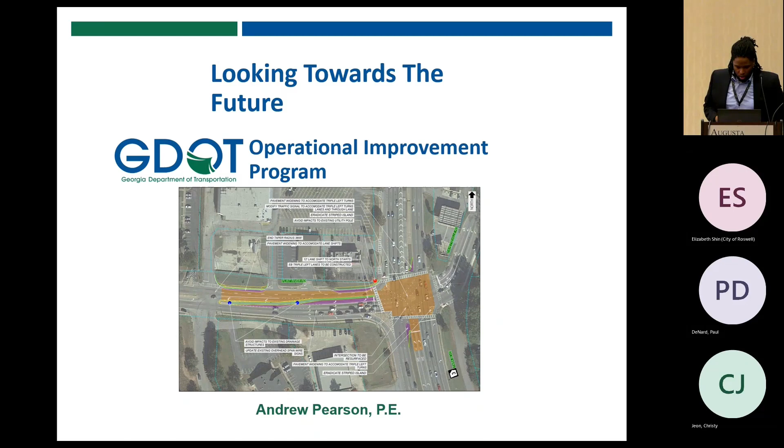So I'm going to talk to you guys about the Operational Improvement Program this morning. So the program, what is it?

Historically, small improvements have been necessary along our roadways, even after large-scale projects come through. So in 2010, GDOT senior management realized there was a need for a change, and so we came up with a program designed to deliver low cost and high benefit projects, with the program goals being to reduce delay, increase throughput, with a targeted delivery time of between 12 and 18 months.

So we're going to go through it, from solicitation to development to approval to delivery. The program is split down the middle of the state. The eastern side of the state is handled by Kimley-Horn, that's Districts 1, 2, 5, and the eastern side of District 7. The western side is Region 2, managed by Arcadis, and they have the western side of District 7.

So solicitation, we get our ideas from just about anywhere, honestly. It starts within our office of traffic operations. We all live in various different places throughout the metro area. For me, I live in South DeKalb, so I can tell you what's wrong in South DeKalb. My PMs, some live in Alpharetta, some live up in Cherokee County. So we try to bring our own individual knowledge base for what we're seeing out on the roads and kind of see what we can do from that standpoint.

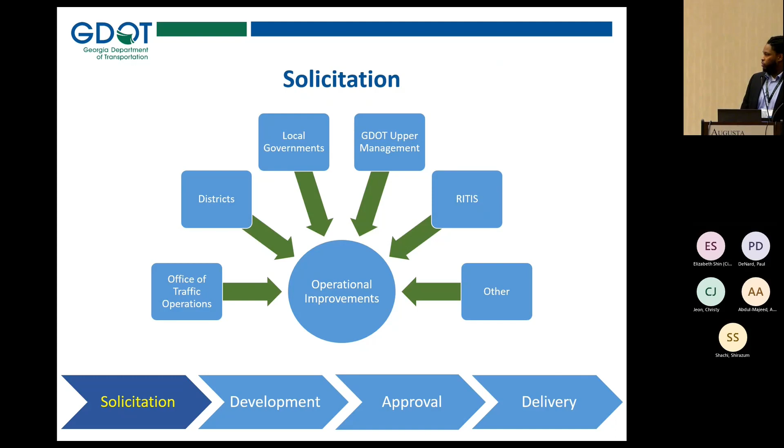So I just showed you the idea database essentially. When we're looking at whether or not a location is viable for our program, we're looking at if it's going to cost a lot of money to construct. We're looking at right-of-way impacts, environmental impacts, and utility impacts as well, and then there's benefit or need for the project. So what our program operates on is the BC ratio, the benefit cost ratio, and obviously the higher the BC ratio, the more viable the project typically is. We're generally trying to avoid anything with high right-of-way impacts or large utility impacts, because that's going to delay the project and drive up the cost.

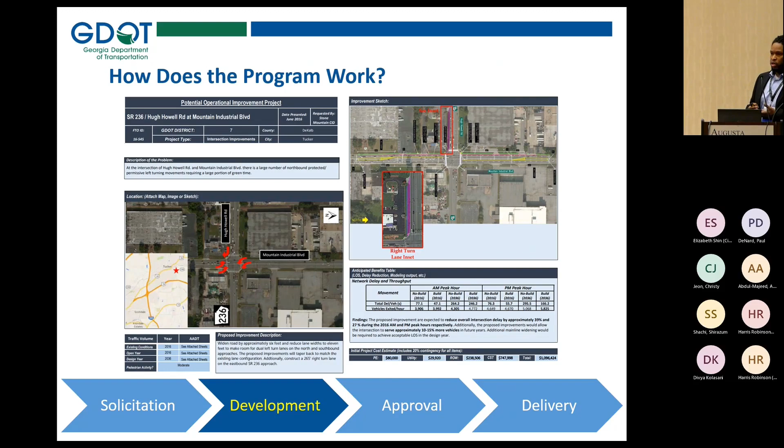After we determine that the location is viable, we'll come up with our synopsis packages. This is a cover sheet for State Route 236, Hugh Howell Road and Mountain Industrial Boulevard. We generally provide an aerial shot of the existing location, the delay it's currently experiencing, what the expected delay will be if we don't build anything there, and what the delay will be 20 years out. We have a summary of the expected improvements, and in the lower right we have the breakout of PE cost, utility costs, right-of-way costs, and construction cost.

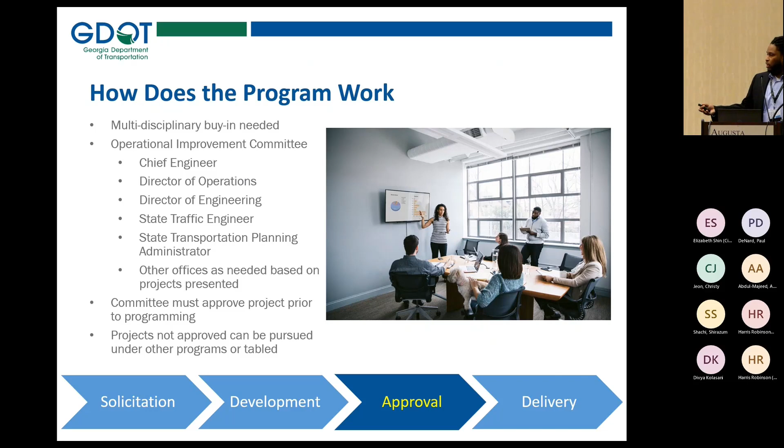After we come up with a synopsis package, we have to present it to what we call the Operational Improvement Committee. That consists of our chief engineer, the division directors over engineering and operations, the state traffic engineer, the state transportation planning administrator, and other offices may be called in to those meetings just to make sure we're not overlooking something and to get those projects approved.

After those projects are approved by the committee, they'll be programmed, and we have multiple options for how we program. Sometimes we have quick response projects, which won't necessarily have to go through the committee. Usually those are significantly cheaper, with a cap of about $200,000, and the districts handle those themselves. We give them the idea, tell them what needs to be done, and send it to them, and usually through their state aid office they'll get those projects completed.

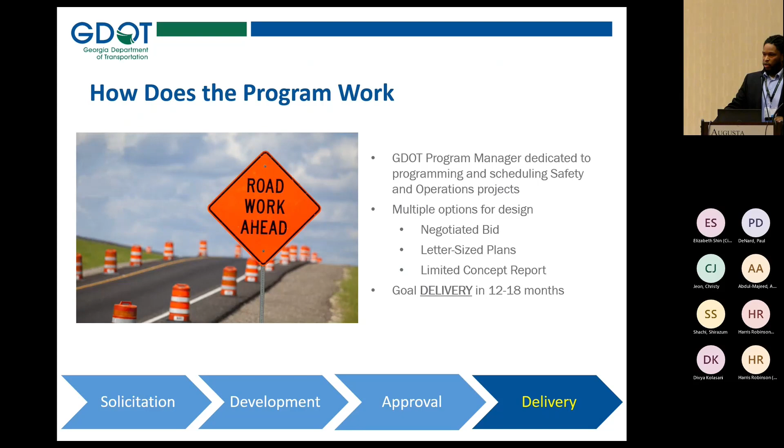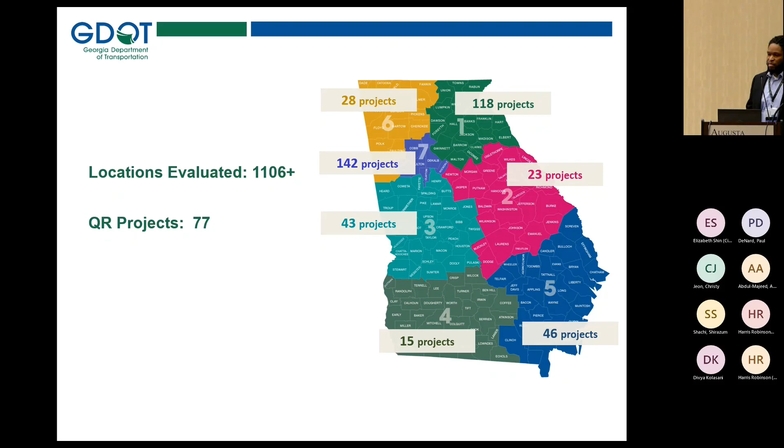So what has the program accomplished? We've looked at a total of over 1,100 locations throughout the state, and we've programmed 77 quick response projects. Currently we have around 415 projects that are active, meaning projects in various stages—currently being screened, under construction, synopsis package, or quick responses. You can see the breakdown: District 7 has a good bit of projects, while District 4 only has a total of about 15. That makes sense when you look at the demographics and how the population is spread throughout the state.

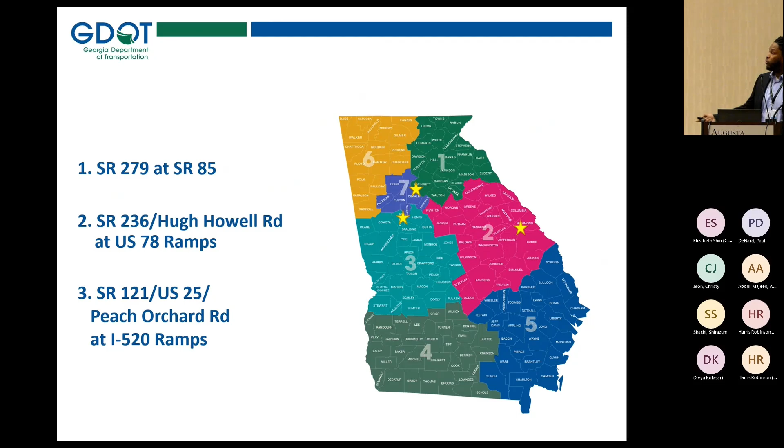So what I'm going to do now is go over three projects that have gone through the entire process—two of them are currently completed, and one is about to begin. This one is State Route 85/279 in Fayette County. This is essentially what I like to call our bread and butter as far as the operational improvement program is concerned. Really what we like to do is extend turn lanes and add turn lanes wherever we can.

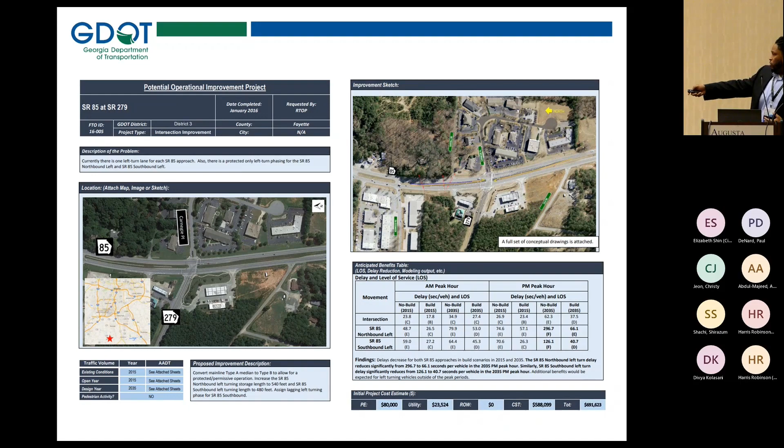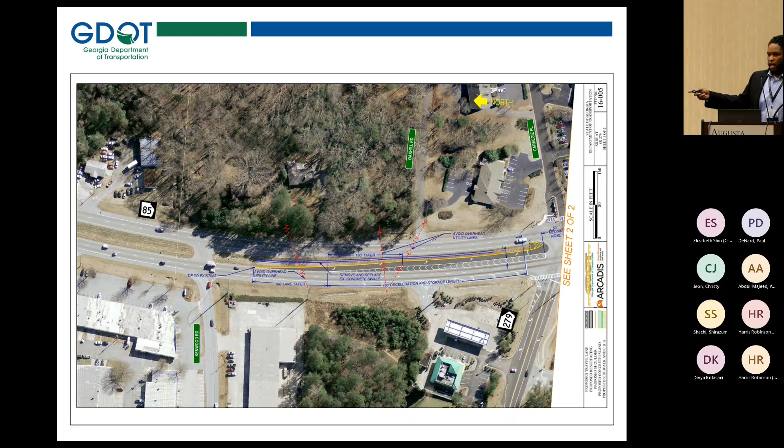So we'll go to this next screen. What we essentially did here is utilize the type A median, then widen into the median and offset the left turn lane. That allows us to make that movement protected permissive, giving drivers a little more time to make the left turn, which helps traffic along the corridor. Then the same thing is done in the northbound direction.

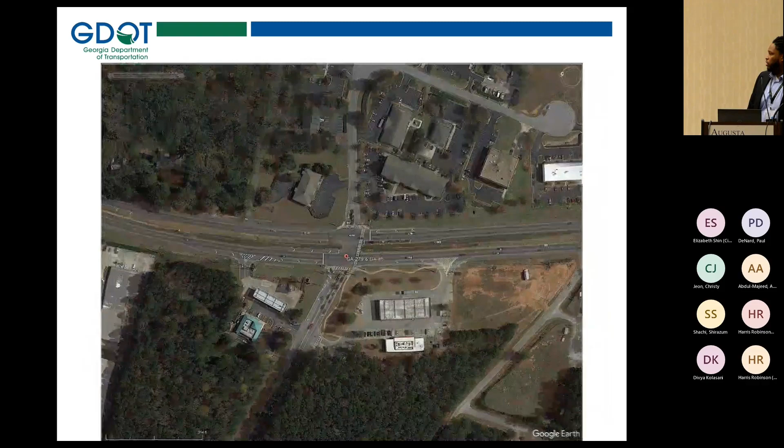So this is just what it looked like originally under construction, and this is what it currently looks like.

The next location is State Route 236 at US 78 at the ramps. This location is a good example because we're looking at someplace where we're not going to have any right-of-way issues, since it's all state right-of-way. The utilities are going to be pretty minimal here because there shouldn't be any utility poles in the general vicinity of what we were planning.

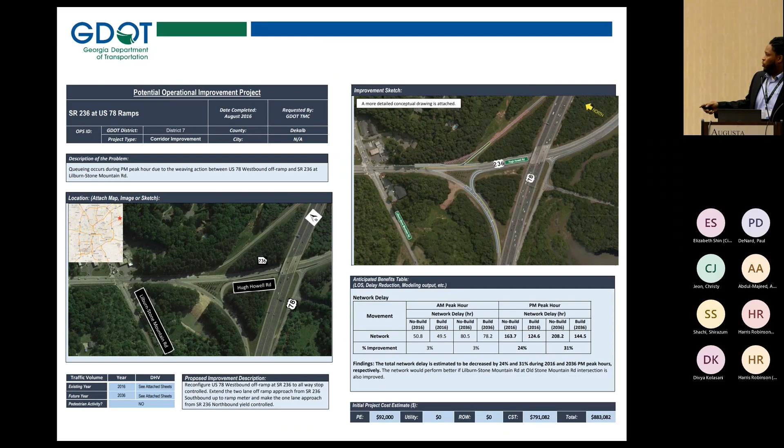So what we looked at doing was address a problem with weaving along the ramp at the top of the screen. We made it yield controlled and extended the right turn lane. So instead of making them weave, because previously it was free flow, now it's yield controlled. After they get onto 236, they have the option to either stay in the through lane along 236, or get over to the right turn lane, which takes them to Stone Mountain Road.

On the southern ramp, what we did there was better align the ramp. Before, it was kind of making it a merge movement for traffic, and a lot of people don't like those moves when merging in from the left—it makes people uncomfortable. So we made the angle a little more favorable, so people operate more efficiently and it's a bit safer for drivers.

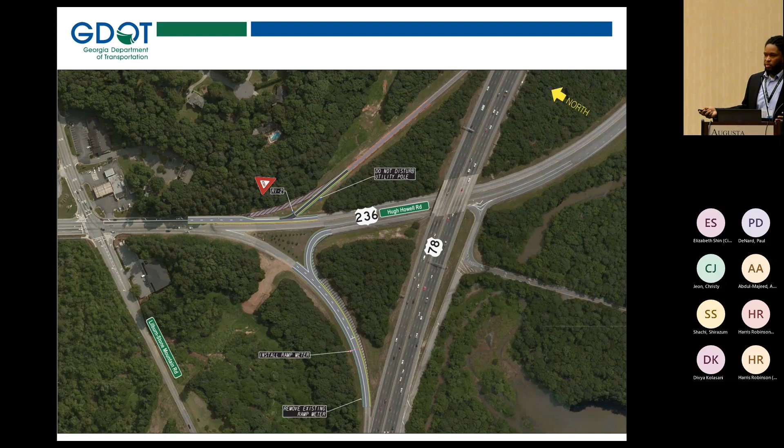So this is what it initially looked like under construction, and this is what it looks like now.

Something also worth mentioning for this location is that at the top of the intersection there's Old Stone Mountain Road and Stone Mountain Road. That's off system, but we noticed during the analysis of this location that any improvement there would have an impact down the ramps. So we ended up coordinating with DeKalb County at that location, and they were able to do that separate from our project, but it ended up having additional benefits for the entire location.

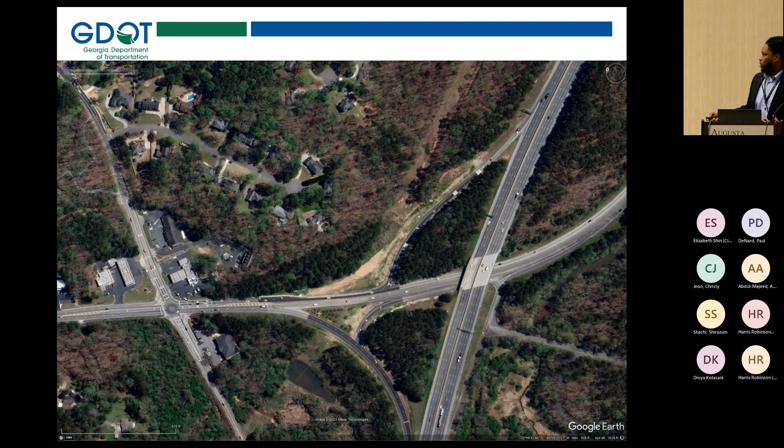The last location we're going to look at is State Route 121, Peach Orchard Road, at I-520, not too far from where we currently are. This is another interchange, and we're doing a lot of work here.

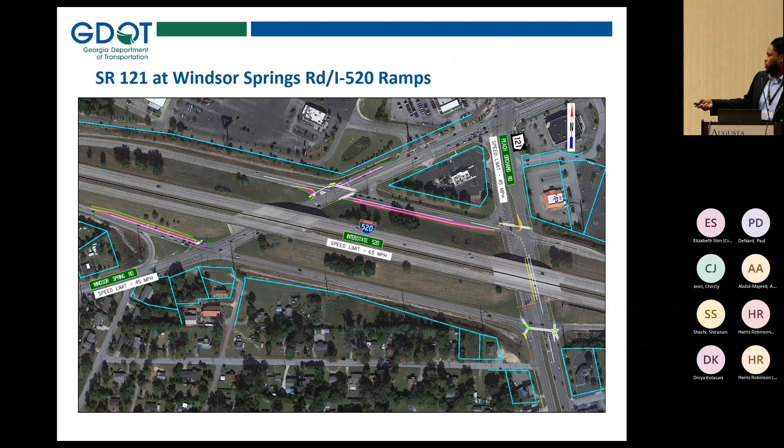This project is about to begin design, and what we're proposing is adding additional left turn lanes along the eastbound approach for 520, and the same going westbound. We're adding an additional left turn lane—you'll see here along Peach Orchard we're essentially utilizing the existing lane widths. Currently there are three through lanes and one left turn lane. What we're going to do is take the inside most through lane and have it drop into what will now be dual left turn lanes, then continue the two through lanes through the interchange, and pick back up on the third lane after you exit the interchange.

And the same thing here, we're just going to add a left turn lane. So you're going to have the dual left movement along with the two through movements—a shared through-left, and a dedicated through movement as well.

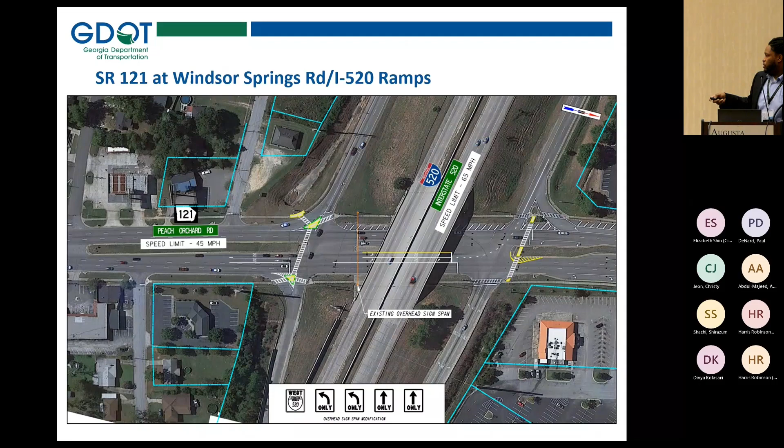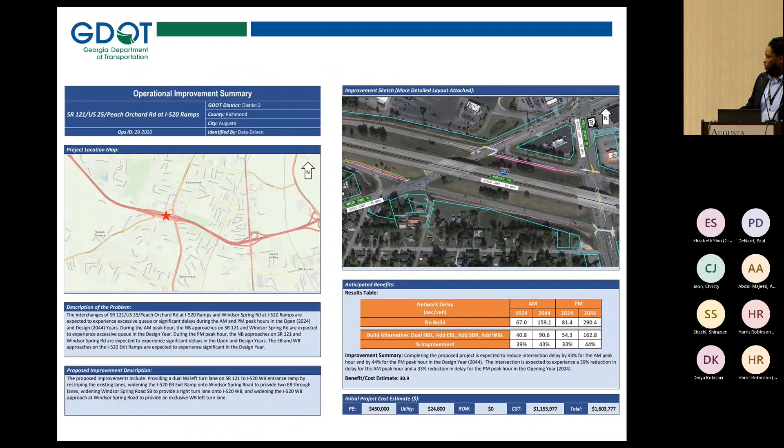For this location, the construction cost is about 1.1 million, which is kind of high for our program—we generally try to keep construction costs a little lower than that. But the reason this project is more expensive is because we're proposing a gravity wall.

You'll see here with the grade right there adjacent to the ramp, we're going to have to build a gravity wall, so that's going to drive up the cost of the project. But with the amount of traffic that comes to this interchange, the benefit's going to offset the cost, and it still made it a pretty viable project.

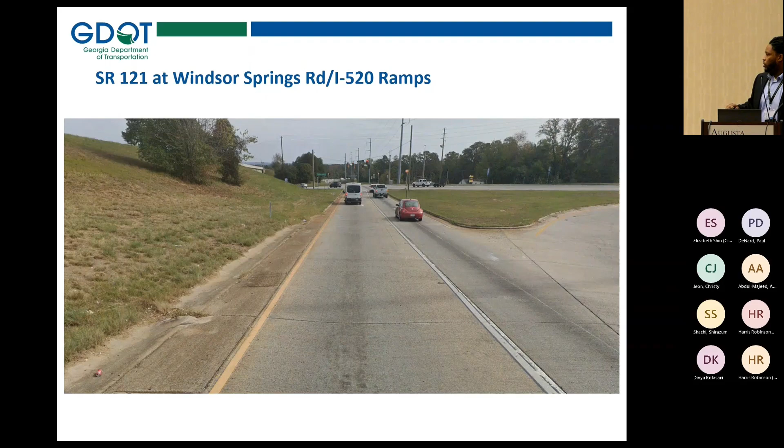So we go over here. We're adding a right turn lane from Windsor Spring, and then we're adding the left turn lane, which is essentially feeding from Peach Orchard, for traffic headed towards 520 in the westbound direction. Since we're adding the dual left turn lanes on Peach Orchard, we want to separate the left turn movement.

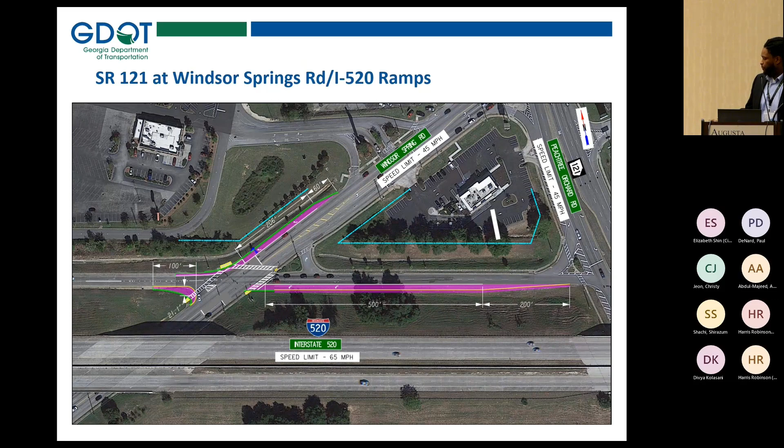So now the dual lefts come, they'll have the 2 through lanes to go through and get onto the ramps. And then if anyone wants to head back to the left on Windsor Spring, they have that dedicated left turn lane. So that is my presentation.

You want to take questions now, or any questions?

Do you do most of the design in-house, or through your team partner? It's a little bit of both. So depending on the project, one of my consultant teams will handle it.

Chuck's with Arcadis. Sometimes Arcadis will do some of the design. Part of our contract allows for them to do some of the design work. And then if it's a little more complicated, we may just contract that out and put it out for bid for somebody else to do the design work.

Are these projects that GDOT typically initiates, or is it something that local governments come to you guys about? It's a little bit of both, honestly.

I find that sometimes local governments reach out to us, and I think those tend to be the more fruitful projects, because if they're reaching out to us, that means they have some stake in it, and hopefully they may be willing to contribute some funds. That's not always the case, but it's great because it helps with our BC ratio, and they're getting something out of it as well. So it's a little bit of give and take.

Feeding projects from the SIGOPS program? We do, sometimes - so glad you mentioned that. Our SIGOPS program, we try to discuss it with all of our offices. So whether it's SIGOPS or safety, sometimes our safety office will look at a location and determine it's not viable for a safety program.

Peachtree Corners is home to a lot of innovation. In the 70s, as evidenced by those pictures, that's Mr. Hayes on the right—it's an actual picture, allegedly. The Hayes modem was invented and developed at Peachtree Corners, as well as some Scientific Atlanta, General Electric. And it started in the 70s.

So much like me, born in the 70s, we're starting to show a little bit of age, trying to recover some of that innovation that we had. The 70s technology is obviously gone and past, and we were a city that had a little bit of an identity crisis.

A few years ago in 2018, one of our councilmen, also a Georgia Tech graduate—you sense a theme here, it's on purpose—said, what can we do to stand out? What can we do to keep from becoming a blighted city? We're brand new. How are we going to maintain that positive movement forward? How are we going to reinvent ourselves? What can we do? We have this cool basis of technology. We need to give it a rebirth. And that's where this project came into play.

Just like the technology was becoming dated, the infrastructure was dated. We had many 70s residential; through the 80s, the residential blew up. All of the streets were built in the early 80s, and obviously getting into 2012, that infrastructure was beginning to age and crumble, and in many cases fall apart.

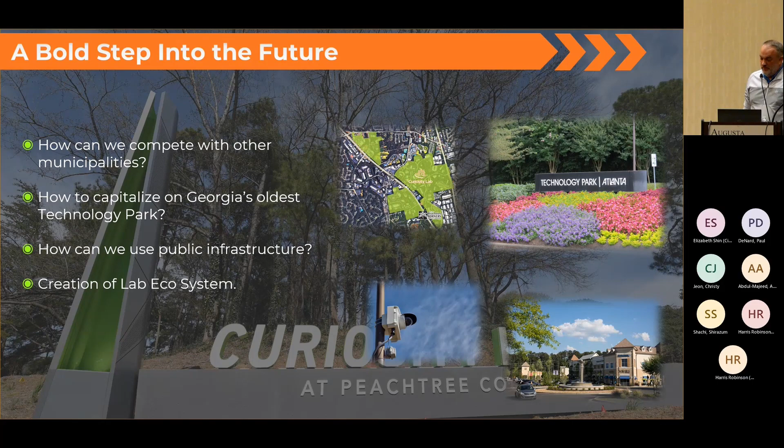We needed to make sure that we were going to not only stabilize that, but reinvent it so it can continue to move upward. I've always felt like if cities and municipalities are moving, you're either moving up or you're moving down. Very rarely are you staying stagnant.

And so we developed this project beginning in 2018. Today it's got a lot of factors. We built this, what we call the city street of the future. A lot of this is going to sound like marketing, which is weird coming from an engineer, but this was an economic development project, so it is marketing in a lot of respects.

We built a 3-mile public autonomous test track. Got a cool 2020 Ford vehicle that was built in Michigan, but since has been transformed, just like our infrastructure, into a very cool, smart vehicle. And then our former City Hall building has now become an innovation center—a very cool vibe place that has a continuous flux of technology, innovation, and a lot of testing.

We have built a laboratory, and it's called Curiosity Lab at Peachtree Corners on purpose. Much like a chemistry lab, you don't always get it right the first time. There's always change, you evolve things. Even if you're a chef into the culinary arts, you rarely get the recipe right the first time. So there's always changes—you tweak things, you tweak the ingredients, you tweak the balance. And this project has continued to evolve.

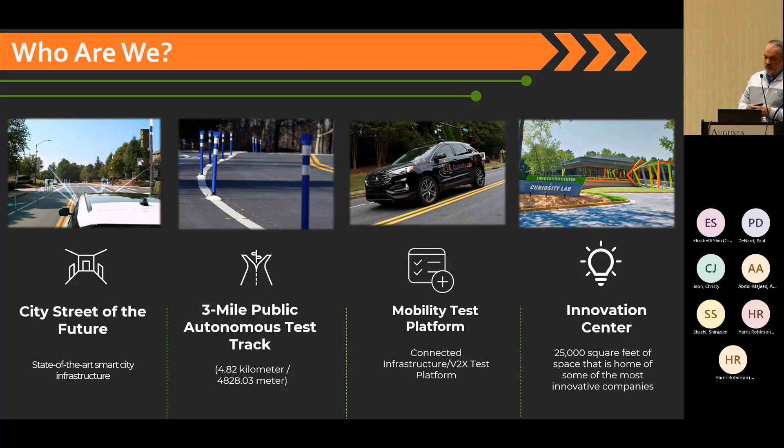We began in 2018 with a clean slate of an old 70s-era commercial suburban street. It was 38 feet wide, had the chicken lane in the middle—the suicide lane—and the vehicles on the outside. So we took that and transformed it into something we believe is more useful today, and certainly more useful for the projects than then.

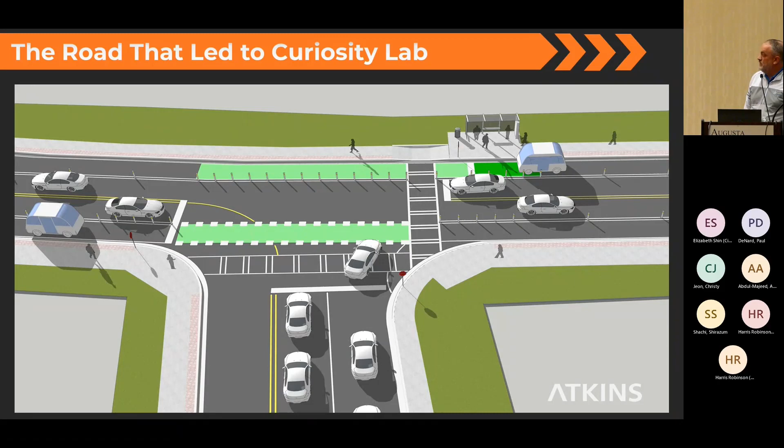We started with this conceptual drawing. This is the intersection along Technology Parkway at Technology Parkway South. We do not have very creative street names at Peachtree Corners, but we have a signalized intersection here now that used to just be a 3-way stop.

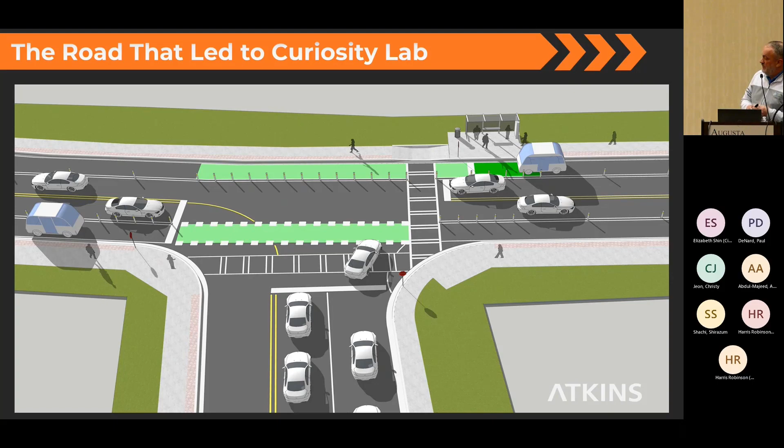We imagined reinventing the two vehicle lanes on the outside and developed a concept where the vehicles are in the middle and autonomous testing lab lanes are on the outside. We created a typical section just because we're transportation engineers, and that's what it looked like at the time.

Right before construction started, and then after we had reconfigured the road—like I said, the recipe changes, the lab approach changes. This was our first iteration. You see some curbs there, some flexible bollards that are separating the lanes.

First few months of this project, lots of conflicts. School buses hated us. School buses eventually decided not to come down Technology Parkway—they went another way.

They actually turned around today in my front City Hall parking lot because they refuse to go down the road. They say it's too narrow. Gwinnett Transit, not big fans of us either. They like to go well over the speed limit.

This was the first iteration. We developed some off-the-cuff chevrons to mark our space out there on the outside. You'll see some signage on the far right that was also creative. And then the bollards themselves have changed over time. This is what we've flexed to today.

In addition to the transit and school bus drivers, the autonomous shuttles themselves were having trouble with those vertical bollards. They read them as a hazard, and despite what is now our 4th year of development, they couldn't overcome that vertical impediment reading as a hazard.

So they said, we've got to get rid of the vertical bollards. We said, no, we can't. NHTSA says we can't. So we worked with some folks at NHTSA and were allowed to use what I was researching, which eventually became this. I found a product called Zicla, developed and used out of Spain.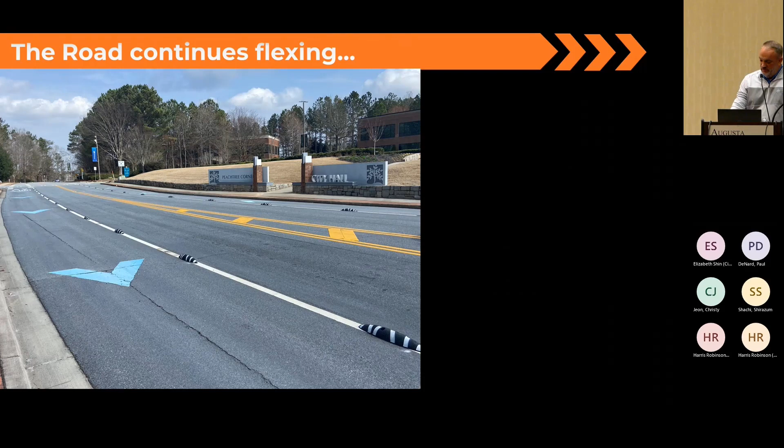At the time, my boss and city manager was at the Smart City World Congress in Barcelona. I said, hey, can you go find some of these things? They're called zebras, and take some pictures. Barcelona has thousands of these zebras across the city. So we purchased those, showed up, and installed them.

Now instead of a vertical bollard, we have these zebras every 20 or so feet, and that's what we're using. So even our infrastructure, as dumb as a vertical separator is, there's no technology involved, but we're having to evolve what we do for the infrastructure so the smart stuff can still operate. This is the 4th iteration.

We started out with white bollards. They claimed they couldn't see them. We went to blue, which was a special order, of course, and got stuck on the boat. Took forever. Fortunately, these Zicla showed up in 11 days, and we had it installed a few weeks later.

This has so far been pretty well received. The transit guys like it better, the autonomous vehicles themselves like it better, and believe it or not, the regular vehicular drivers have complained a lot less. This will not flatten the tire, which we've tested. It will not flatten the tire of a bus for sure, and they test that every day.

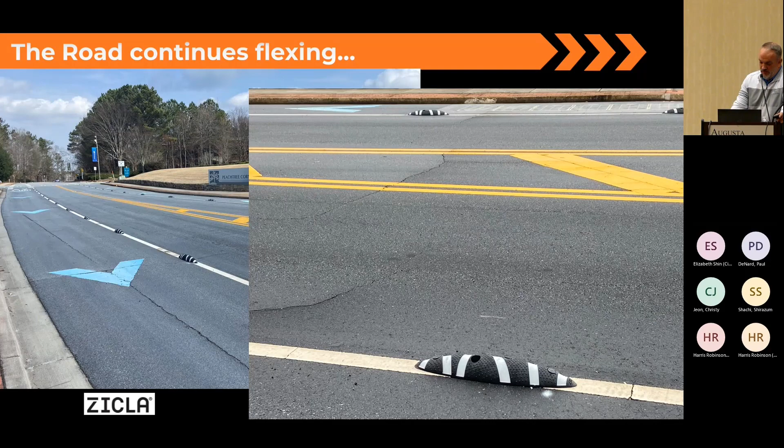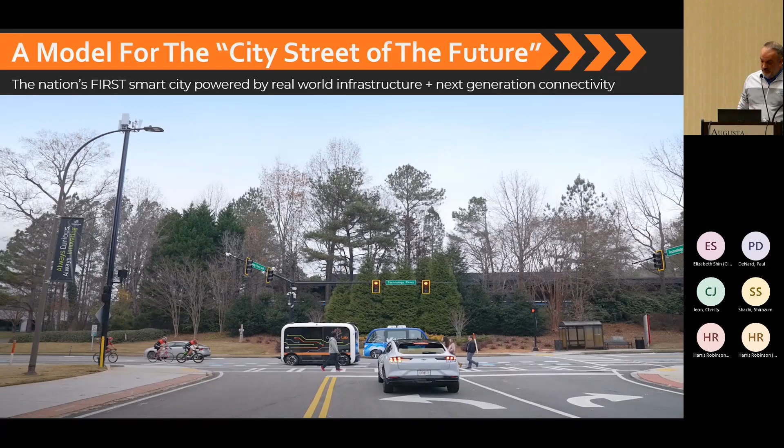So what we've developed, outside of the dumb stuff like bollards, is what we're calling the street of the future. We've got this intersection that we added. This was not a warranted traffic signal; we added it just because we wanted to test it out. We've got 5G connectivity throughout the corridor, thanks to our partners at T-Mobile.

We've got the shuttles there operating. Cyclists, shown in the green block, are regularly using this corridor. We're about half a mile from Norcross High School, 4,000 students plus, and many of those students walk down this road to the RaceTrac in the morning to get coffee and other things. Then we have standard vehicles and pedestrians. So we have an interaction here of every mode of traffic that's standard in Metro Atlanta, including the transit.

I don't have a picture of the transit — they did not slow down enough for me to take a picture. Even on the bottom right side of this, you see the transit stop. So this has everything we need to test, to make sure everything's talking to each other and all the complete data is being captured.

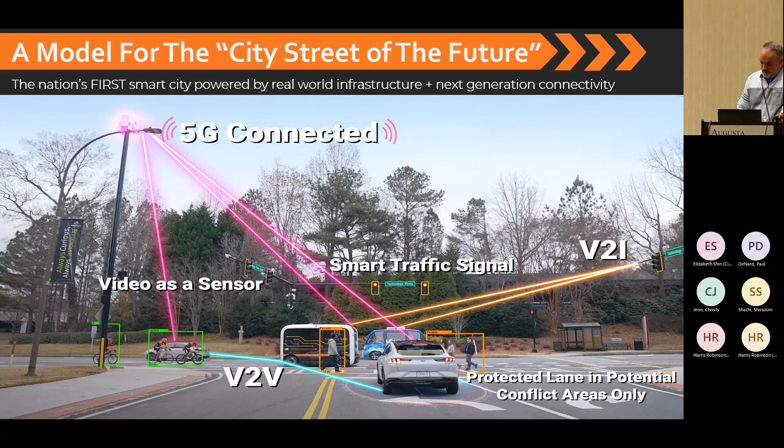In addition to just testing stuff, we have what you can't create in a laboratory or in a kitchen — a real world road. We have a mature tree canopy, like I said, 40 plus years of development, with some very old trees. That car just went up a 13% grade.

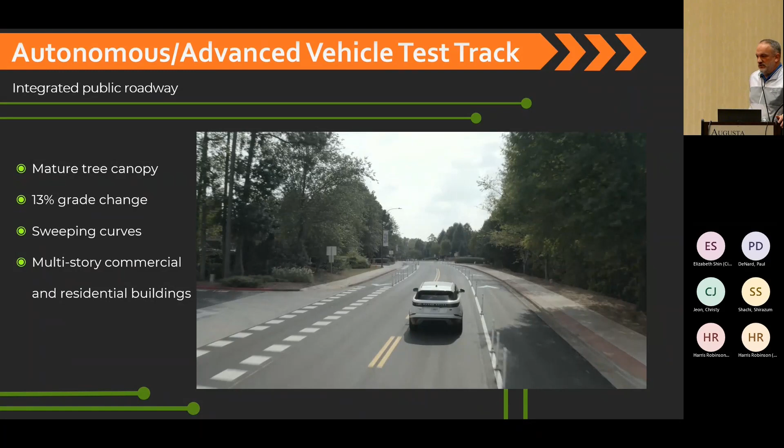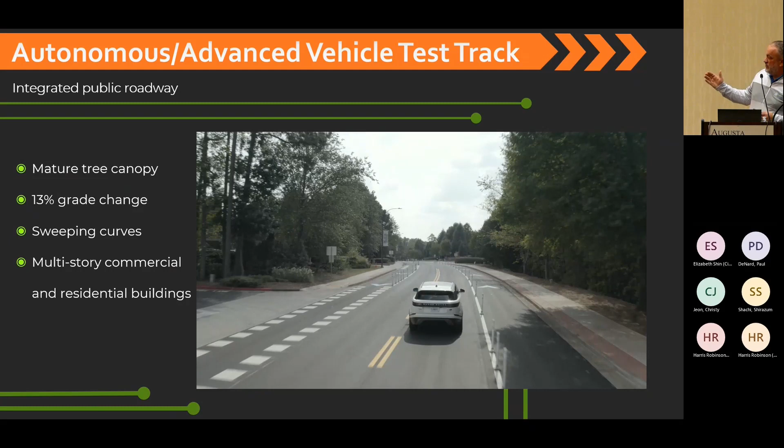Believe it or not, the autonomous shuttles struggled mightily with that grade, especially in the rain. They still struggle in the rain, which is disconcerting, but they overcame the grade change. They overcame the sweeping curves — sweeping curves is an economic development term for a sharp curve — and then multi-story commercial and residential areas.

And then the coolest Ford in the fleet — you can see we bought that in 2020. It's got direct mode, it's got OBUs, and it's talking to pedestrians, if you're so inclined, with your smartphone and our app.

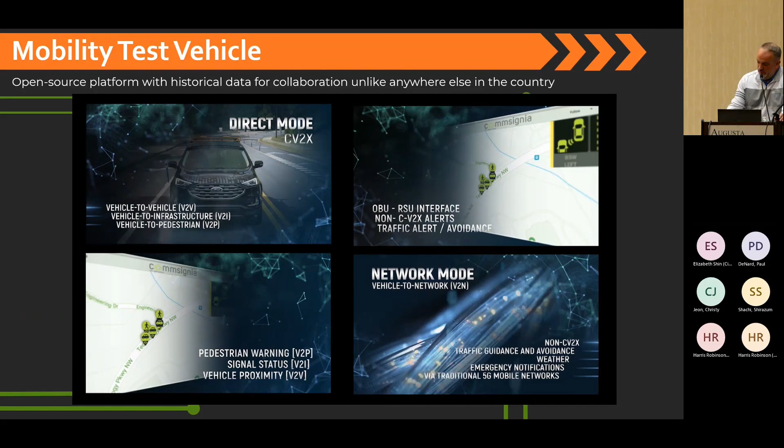We have the North American headquarters of La French Tech, which is the technology arm of the International Chamber of Commerce for the country of France. That's been fantastic. You'll see some of the data in my presentations in metric, because I've given this to them several times and they talk metric. Remember in the old days in the 90s when we did metric for a minute? Yeah, that is fast.

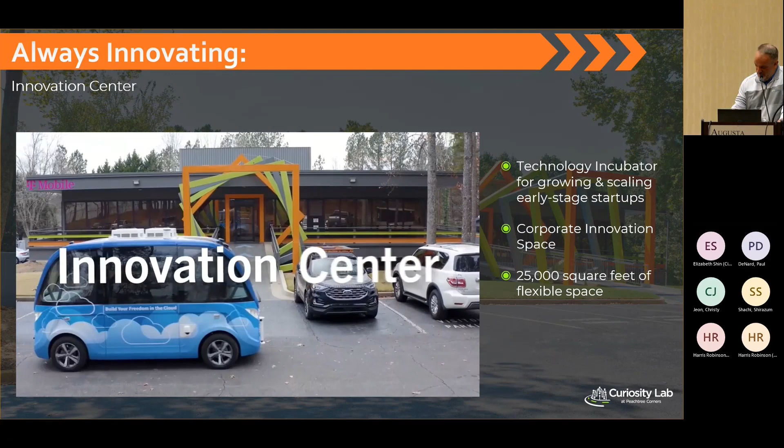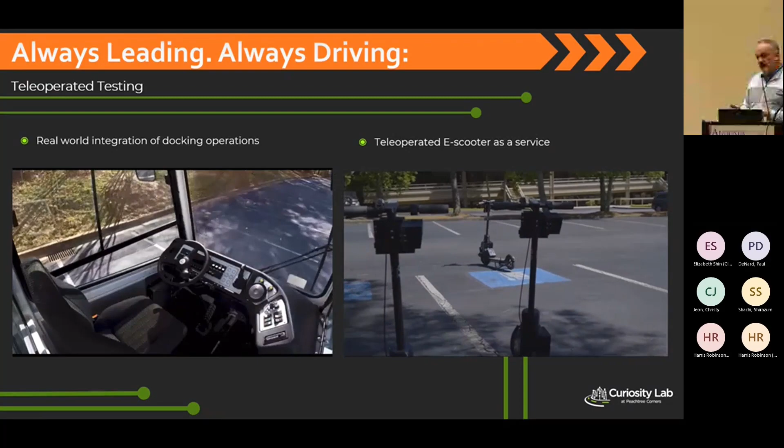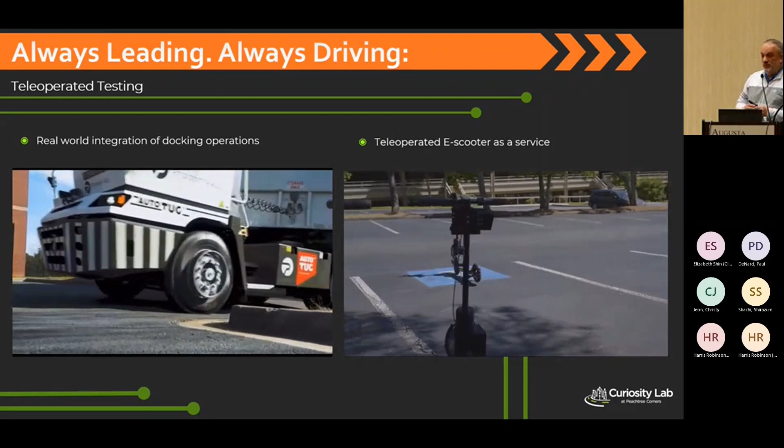And then a number of other things, not just traffic related, but we have had remote driving testing. Imagine a big FedEx distribution center, lots of guys and women driving, hundreds of employees working. What if you could remotely drive those trailers around with one person? So you have one FTE instead of 100, moving things around safely, just on the yard, not driving down the road yet, but just moving them about. Logistics of backing them up, emptying, taking them to wait, and then having them into another bay to load.

They did testing for 2 years, remotely driving those trailers. And on the right, you saw teleoperated scooters. It's like an Uber scooter - that was my term, not theirs. You could call that on your app, and that scooter would be driven to you remotely from a guy in Mexico City, believe it or not.

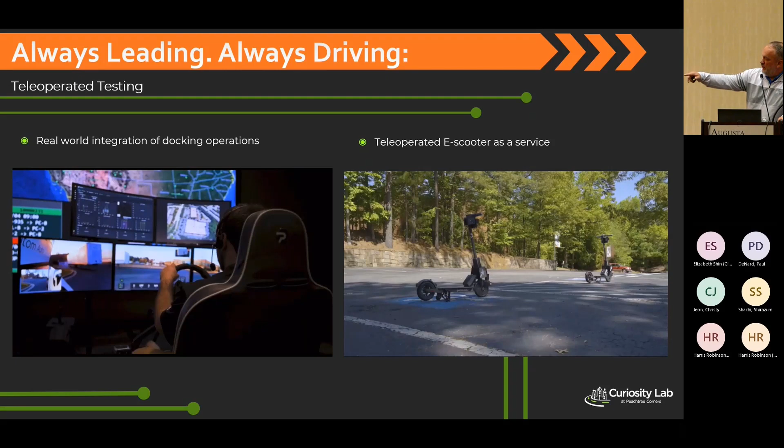The trailer driver was in San Jose, California. But you could have that scooter delivered to you, ride it as you see fit inside of our boundary, of course, because we're testing. And then when you're done, you tell them you're done, and it was remotely driven back to the docking station to be charged. It wasn't like downtown or Midtown, where they're just laid over in the curb, dumped on the corner, blocking the stop sign - that was in the news for a bit a couple of years ago. This was a much cleaner and more efficient way, and they're still tabulating a lot of that data to see if they can expand that system.

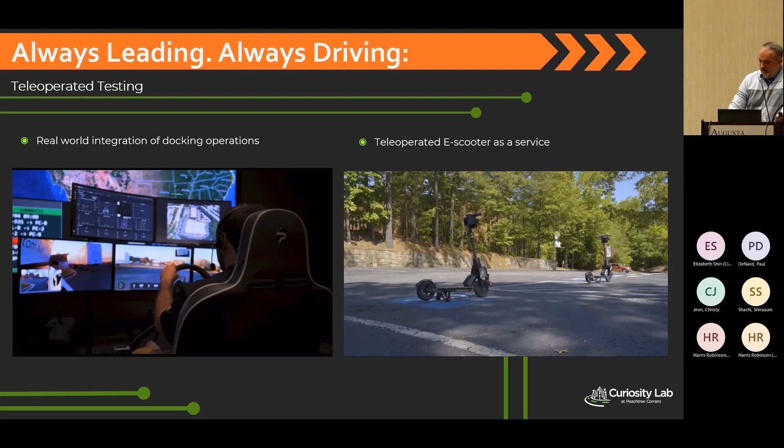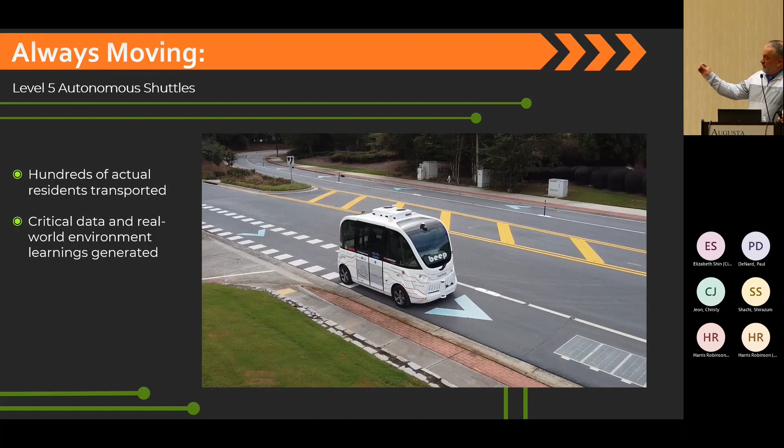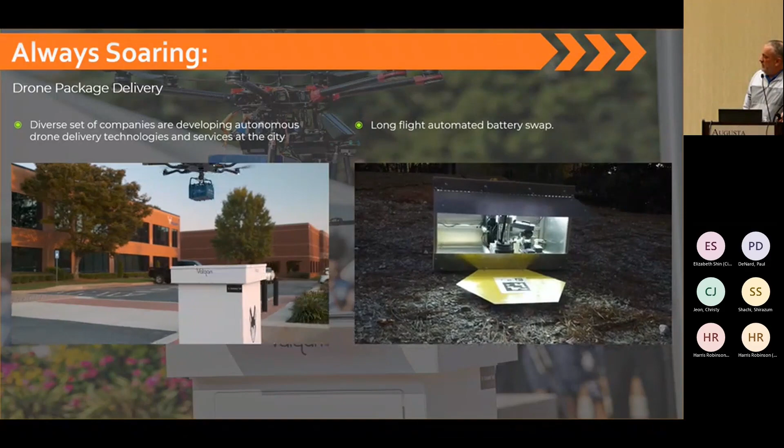I've had numerous other technologies that we've tested. These are not renderings, these are actual videos. We've had drone delivery. Imagine if you want some Chick-fil-A for lunch, instead of having to get in your very hot car and go wait in a very long line - no matter their efficiency, it's an arduous task. What if you could order Chick-fil-A, and instead of having it Ubered to you, it's delivered via drone? That's the kind of testing that they were doing. They're dropping a package of food there in that predetermined box, from City Hall.

On the right side, they're testing changing batteries. A huge problem with drone delivery is battery - the battery weighs a lot, and the heavier the battery, the bigger the drone. And those batteries die quickly. While they wait on technology for the battery to improve, they're figuring out a way to autonomously replace the battery without having to have it done by a human. It's fantastic stuff.

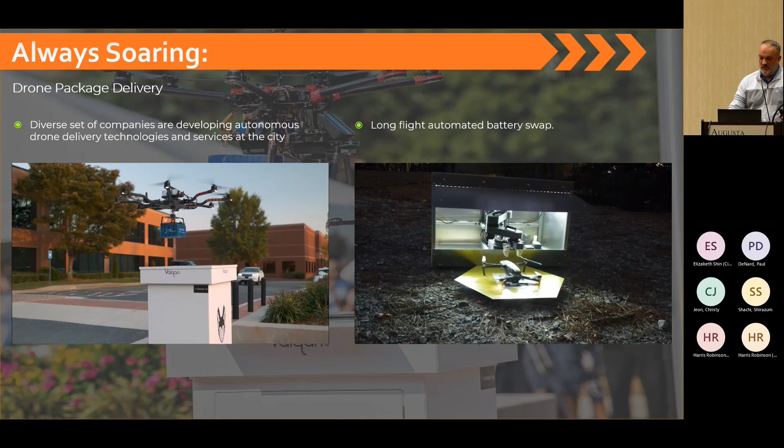And even outside of what we do, Secret Service has been here off and on over the last few years testing cybersecurity. Obviously, if somebody hacks into our system, they hack into the DOT. You've seen movies where that goes awry, where they let bank robbers get away by changing all the lights to green. Well, it's usually much more nefarious in nature when somebody hacks into the system.

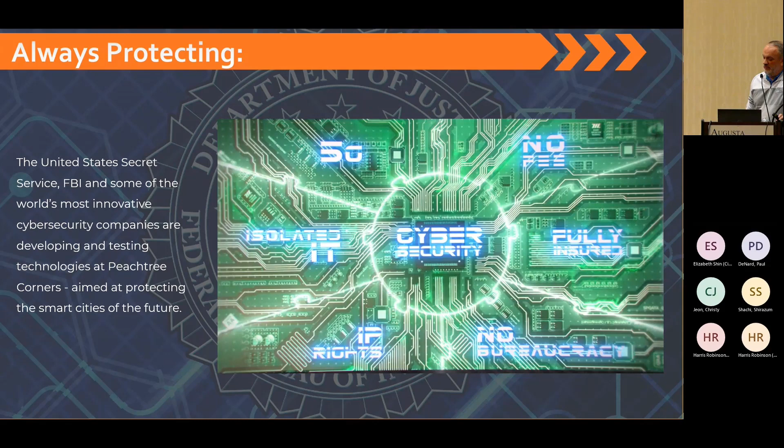So the Secret Service has partnered with us for a couple of years. This was last summer. If you look closely, that's the former mayor of South Bend, Indiana, Mayor Pete Buttigieg, now the Secretary of Transportation. He and his team were here last summer, and he actually stuck around for a couple hours.

I was expecting one of those things where the Secret Service comes in. They actually did park beside my office, which was really cool. He came in and was here for 2 hours in our city hall. He actually called our mayor two weeks ago, one of those things like, hey, can you take a call from the Secretary of Transportation? Yeah, sure. It really was him calling.

You heard last night from John Orr about all the new categories of how federal transportation funding is allocated, some of the categories being determined. His office is trying to figure out how we can make transit smarter, right? Transit's been pretty dumb for a long time, no offense to any of you in transit. It hasn't evolved like other technology at the same rate.

So how do we get autonomous technology to make transit more effective and efficient? Most transit agencies are at a loss. They're trying to figure out a way to make that better so we can expand transportation into areas that don't have transit operations now because of funding. Really cool partnership with them. I mean, how many mayors have the Secretary of Transportation's number in their cell phone?

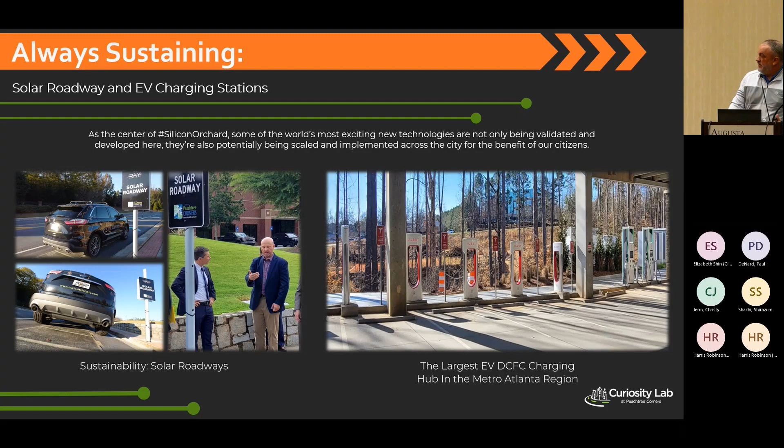So really cool opportunity. You also heard John Orr talking about electrification. We have Metro's largest EV charging station there at our town center. In addition, we had a federal grant last year to develop what we're calling a mobility hub. We're going to have connectivity for pedestrians, transit, all modes that are going to be public, and a charging station for all of those. Hopefully the transit comes up electrified as well.

They'll have electrification opportunities there, and what we believe to be a future drone testing site as well. That's going to be in the corner just above City Hall. That's under development now. I'm having to go through an environmental assessment with HUD. If you ever have a bad day, try having a conversation with HUD and your life will get better.

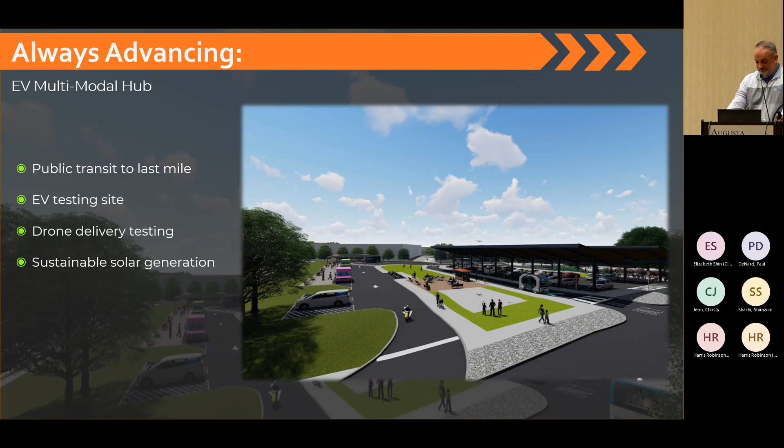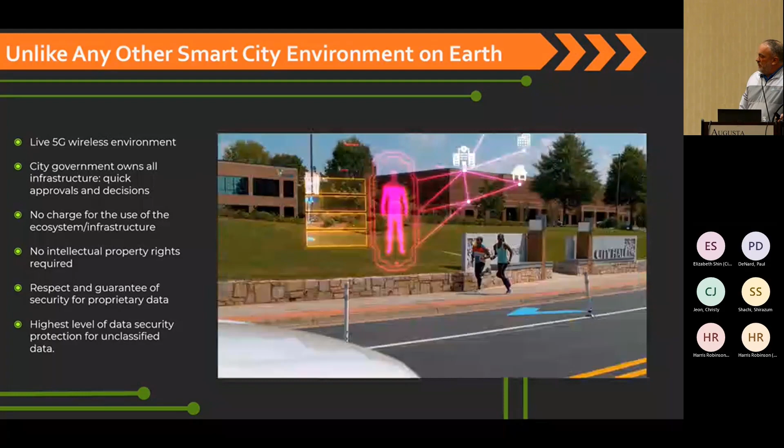Again, this is one of those cool marketing videos. This is the entrance to the Technology Parkway off Peachtree Parkway going north towards City Hall. There's just an amazing amount of cool stuff happening every day. It's never boring. If we ever get slow, we can just look outside and find some work we can do to evolve this project, turn it into something more effective.

That even led to something called Curiosity Lab Criterium. It was just two weeks ago when I learned what a criterium was. It's actually a French word for a bike race. We're going to have a bike race here in a few weeks in April. If you're really into biking, it's called a crit, by the way. But a criterium at Peachtree Corners, we're going to have a professional bike race.

They have a circuit they go through in the spring across the United States. We're fortunate to have them coming on a Wednesday in April. $10,000 to the first prize winner, but it's going to run through the afternoon. They're going to have onboard units on many of these bikes, and we're going to be capturing data for them using our partnership with Spoke.

Those bicycles are going to be talking to the infrastructure we have in place, just like our autonomous vehicles do, just like those of our residents who have that app that talks to our data-capturing infrastructure. So another cool opportunity for the Curiosity Lab to expand beyond regular traffic and transportation. Now we're moving into bikes, focusing on those critical, vulnerable users. Pedestrians and bicyclists are vulnerable, even to the autonomous vehicle to infrastructure. It's going to be a cool opportunity for a lot of data collection, and then cool to be broadcast internationally online.

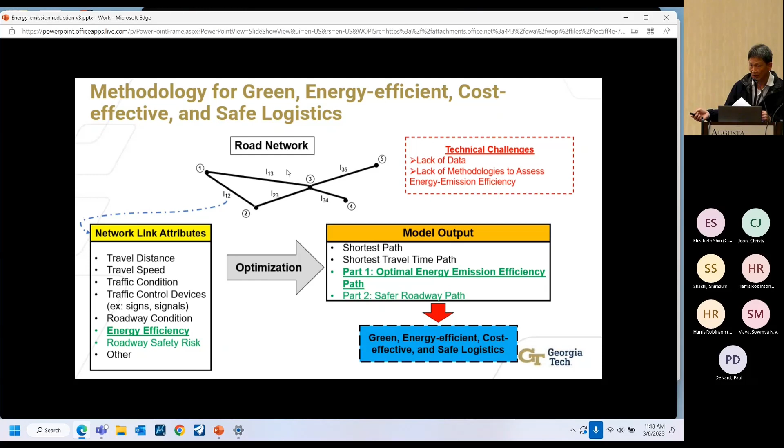So that's the one. And today we do a lot of those in green color, which is part 1, part 2, in terms of minimizing - it will improve the safety. What route do you choose to minimize the crashes? And then choose the route to minimize the fuel consumption, emission consumption. But today I'm going to share with you only focusing on the energy part, not the safety part.

So this is the one that gives you a statistic, which is the first key takeaway - how big a deal this problem is. If you look at almost 1 gallon of the energy, which is CO2, for the diesel or gasoline as well as diesel, it can produce almost 9 kilograms of CO2, as well as 10 kilograms of CO2. So there's a lot of pollution. That's why earlier I mentioned about the hand-in-hand energy - if you can cut down the energy consumption, you can cut down the fuel emission too.

And just to give you an idea, in the US in 2020, the transportation sector contributed how much of the greenhouse emission? 27%. So there's a lot of room when you're talking about carbon - you have a lot of chance to improve on this sector.

In terms of energy, what's the energy there? This is in 2020, just statistics, right? So I'm just talking about trucking. If I say, let's make a guess - in the US trucking, how much fuel consumption in a year? You can see here, it's almost 38 billion gallons just for trucks or buses in a year. That's how much they consume. How about if I can cut down 1%? That indicates you can save 0.38 billion gallons of money, or reduce that much emission a year. And how about 10%? That means 3.8 billion. That's just simple math calculation.

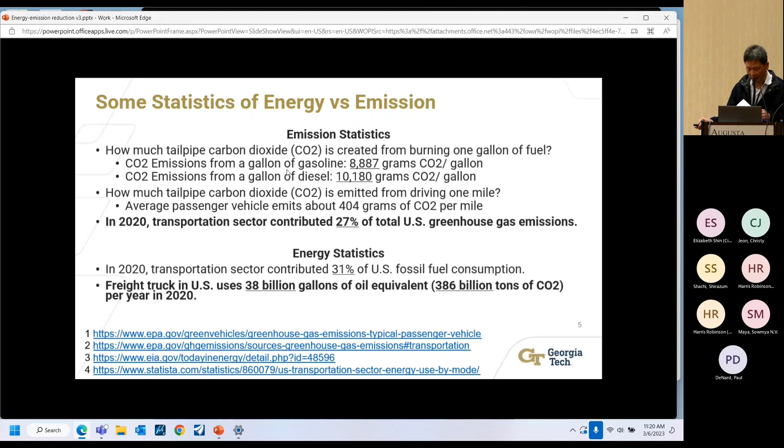So anyway, that's the first key takeaway - hopefully you see those statistics. Second, this message I want to show you is from working with a trucking company, the Volvo automobile industry. Their vision - they do not think in one shot that immediately everything goes to EV. In a way, their customers, some of those in the city, they have a strategy. If it's in the city, it actually makes sense to use EV right away. But if they go down to long haul, really, they are not making money that way. So they are not going to be using EV at this point in time.

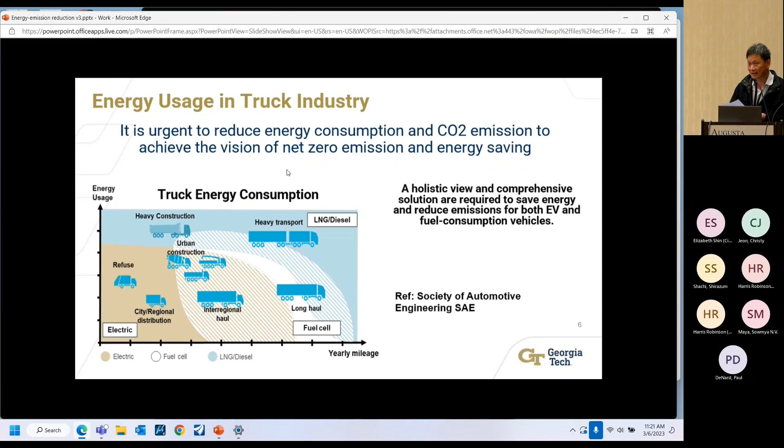They just continue using the diesel until there's better technology, and that's just the reality. You can say you guys need a change, but this is just showing what I mentioned earlier—it's not going to take away in one day, everything changed. It may take 3 or 5 years, gradually moving to EV with technology advancement. But we need to do something now, because we probably cannot wait in terms of cutting down the emission and reducing the energy use.

This is the methodology we proposed, as I mentioned earlier. At this point in time, do you recognize, for a GDOT vehicle driving on the roadway, how much fuel consumption there is? And day 1, day 2, what's the contributing factor? Probably you have no idea, because there's no methodology. But then how did you improve or cut down?

So the first step we did is put together a system. Basically, we have a smart data collection system using a smartphone, and then we do segmentation-based data collection, analytics, and monitoring. So the whole idea is to try to optimize.

In simple terms, it's like this: you have MARTA buses driving a certain route. You define it using a smartphone and their mechanism, called CAN bus, to monitor fuel consumption, linked together, but now using location reference. So for example, this mile, this 0.1 mile, I segment that. That way, day 1, day 2, with different loading, different weather, etc., I can see what the different contributing factors are and what the fuel consumption is for that 0.1 mile.

That way, because I can synchronize them in a data analytic framework, I can say day 1, day 2, day 3, I have a way to integrate them and monitor them. Day 1, day 2, what's their fuel consumption? Then I can analyze the contributing factors, and then I can make an improvement. So it's a very systematic way to process that.

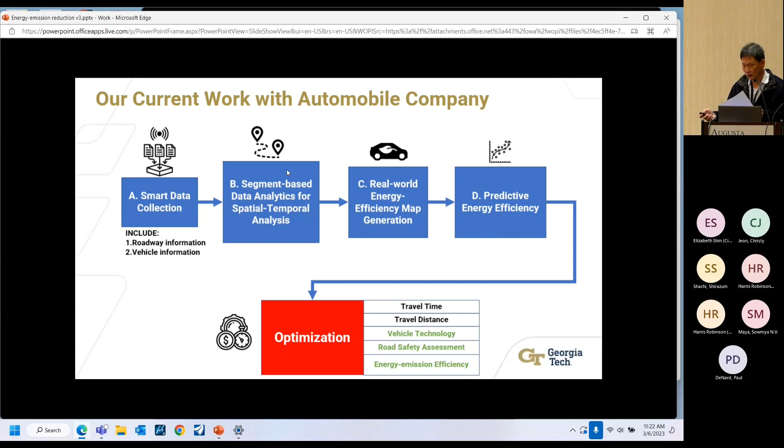This is the data collection mechanism we sent to Brazil, to the Volvo company, and they put it together. This is the CAN bus, which is in the vehicle—you can get an idea of fuel consumption, as well as RPM, throttle, and all those details. At the same time, we sent them a smartphone application, so they can collect the data to extract that. This is the total smart data collection system.

So if we want to install this in Georgia DOT, we just put it in there, then they can analyze that. This is the data being collected: fuel consumption, vehicle speed, RPM, torque, gear position, and all that detailed information, as well as IMU data—XYZ detail—showing driver behavior.

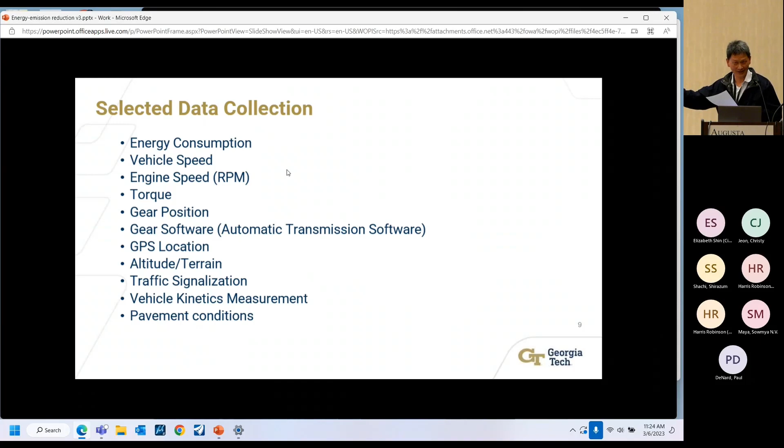That way I can correlate—oh, this person suddenly hits the brake, and even going downhill still presses the gas. This contributes a lot to fuel consumption. So you can scientifically get an idea—in the future you won't just say this is a roadway issue with potential safety improvement; you might say this is a driver behavior issue with energy saving potential. Then you can identify and improve that, and cut down your fuel consumption.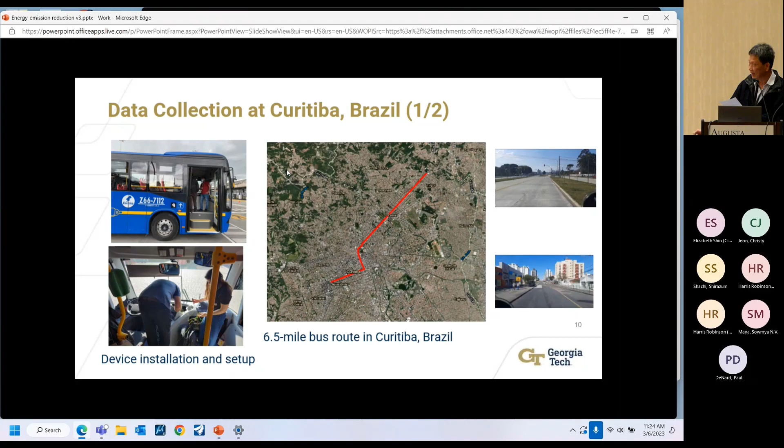This is in Brazil—this is a section where they constantly collect driving data. This is their vehicle; the driver goes through the urban area using our data collection system. They put the system into the vehicle, with different people driving, including bad drivers and poor drivers. This is the buses they're driving. They started in Brazil, then Chile, and then Colombia probably used the EV.

This is something I shared with you earlier—I mentioned that traditionally people just do machine learning and time analysis. Basically, you're driving your GDOT vehicle, or this MARTA bus, just by the second, but people drive at different speeds. How do you compare day 1, day 2, day 3? So in the end, all the papers end up being just one-shot analyses. It's not sustainable to analyze the data because there's no comparison across day 1, day 2, day 3, since the analysis interval is, say, every 1 minute.

One minute you're driving today, tomorrow, the speed is different. You're talking about different terrain, different position over that one minute driving distance. So how do you compare fuel consumption in that one minute? We are suggesting you should use this methodology with an anchor point at a specific GIS location. You fix the same location, whether it's MARTA every year, every day. I have the same location, anchor point, 0.1 mile. So I know your fuel consumption, your loading, your gear, your driving behavior — the input parameters and the output, which is fuel consumption. Then I can scientifically analyze what are the contributing factors to this 0.1 mile, and if you have 100 points, you have a lot of data to analyze the contributing factors.

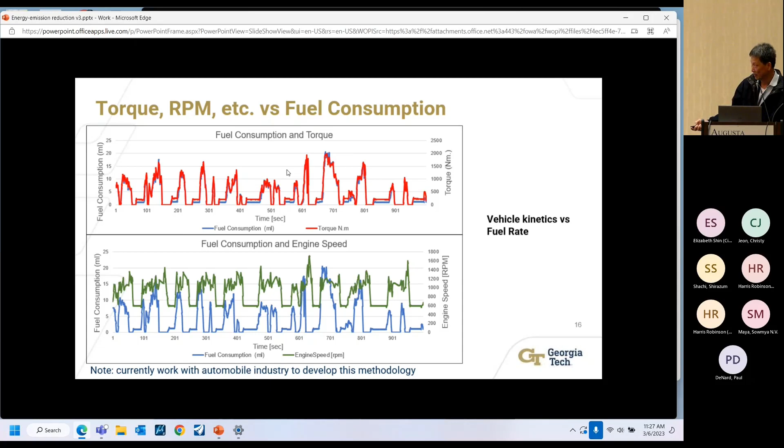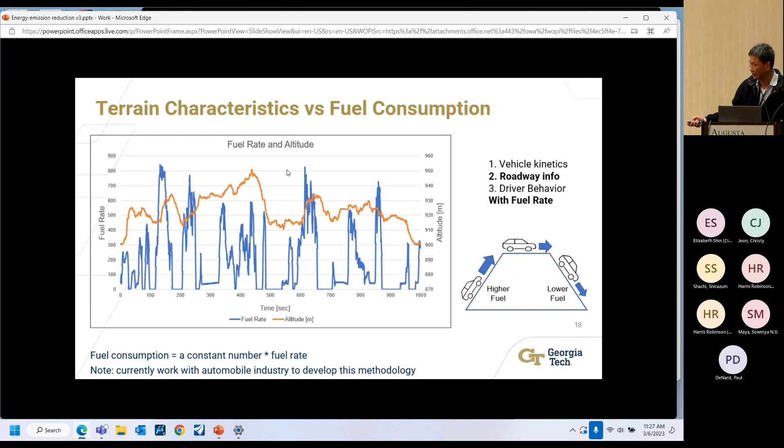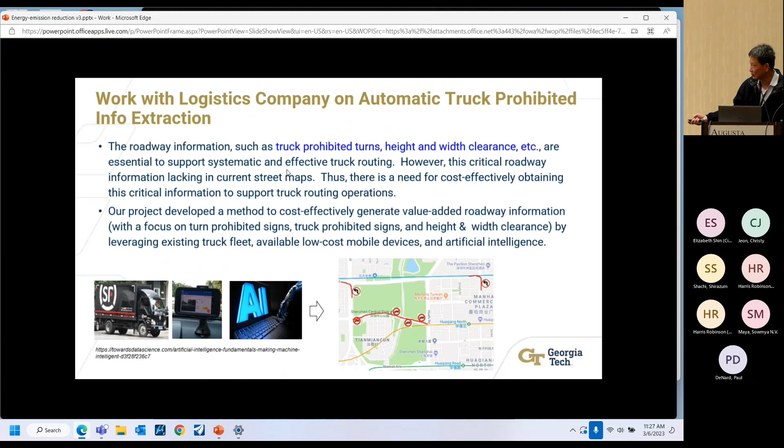Through this data, we did all the analysis. You have terrain, and you need to correlate that within the 0.1 mile — what's the terrain, uphill or downhill, so you can correlate them. Then also traffic signal conditions — is traffic saturated or not, does that impact things? Yes, those are factors, along with traffic condition, uphill and downhill. And then what's the vehicle rolling resistance? Based on the automobile industry, rolling resistance contributes almost 13% of fuel consumption — about 13% from the pavement friction and roughness, the rolling resistance from the pavement texture itself. Those are the factors.

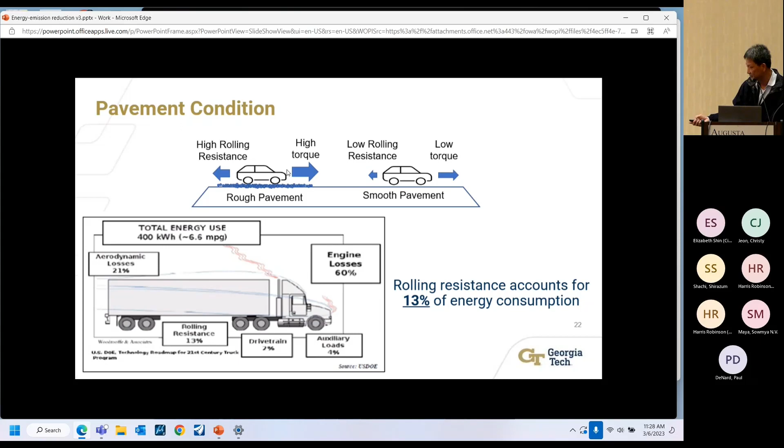This is another idea that came up. In the future, traffic is going to impact routes, like in Atlanta — for the route from Tennessee all the way to Florida, when is the best time to drive? So we're thinking we should be able to create a map — what's called an energy or consumption map.

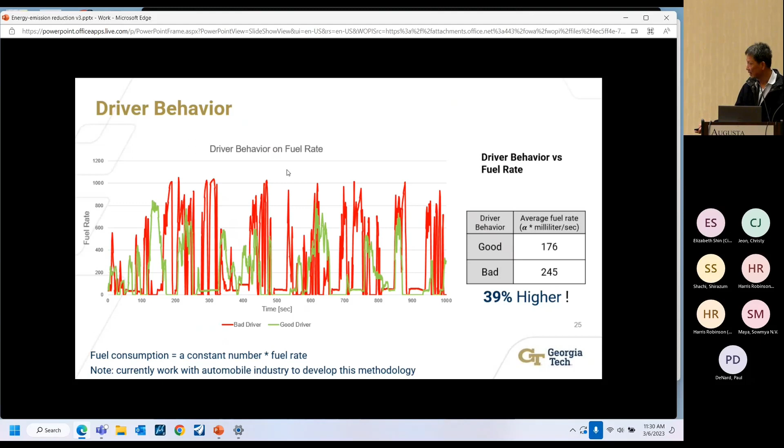So in a way we try to create an idea in terms of a map. I figured out that Google in 2021 already started a program for sedans in terms of fuel consumption estimation, but they haven't gotten into trucks and buses yet. But this is the idea: if you know at different times, different hours, with different colors indicating what the fuel consumption level is going to be for that mile segment.

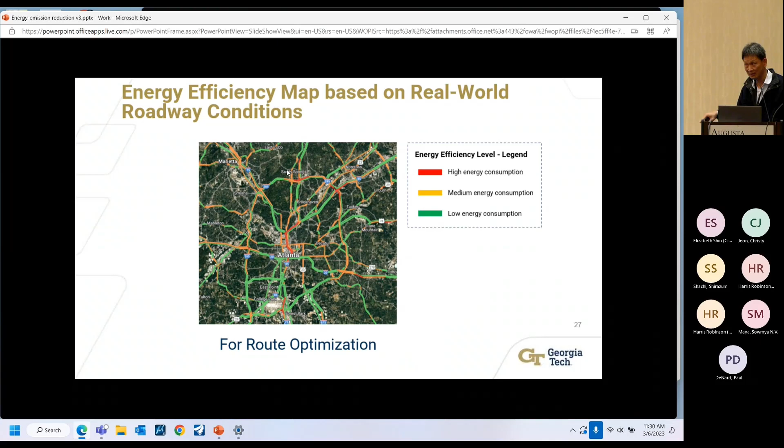Then you can come up with an optimal route from Tennessee all the way to Florida - what time should I route? I can cut down 10, 20% of fuel consumption on that route because you can get rid of traffic, don't stop right there, etc. So this is prediction.

At first gear, you need to use a lot of energy. But when your speed gets to a certain point, you shouldn't continue using first gear - you should shift to second gear. Otherwise you're going to use a lot of power with really no need, because at this speed you can change to second gear, then you can change to third gear.

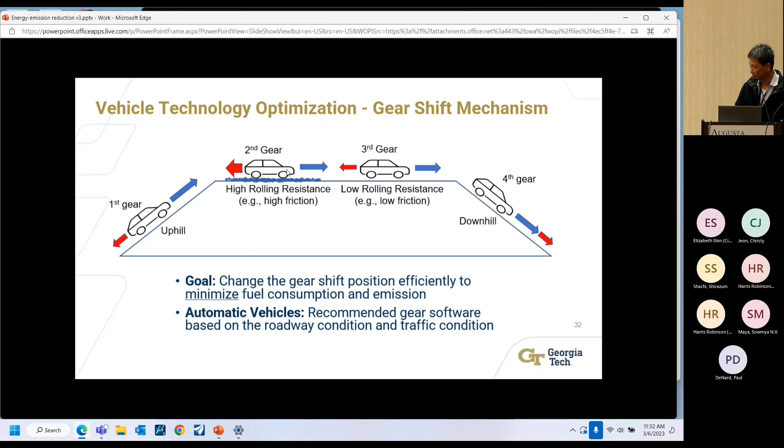So there's a lot of room to optimize mechanistically, in terms of the right terrain and right location where you shift gears. If the terrain location is different, you probably need to use a different gear. So how do you use vehicle gear shift optimization to take advantage of that?

The other one is related to route optimization. Earlier I mentioned if you have different times with different consumption - let's say for this one mile, you know what the fuel consumption is at 8 p.m. to 9 p.m. versus in the early morning - then you can determine what the routing should be.

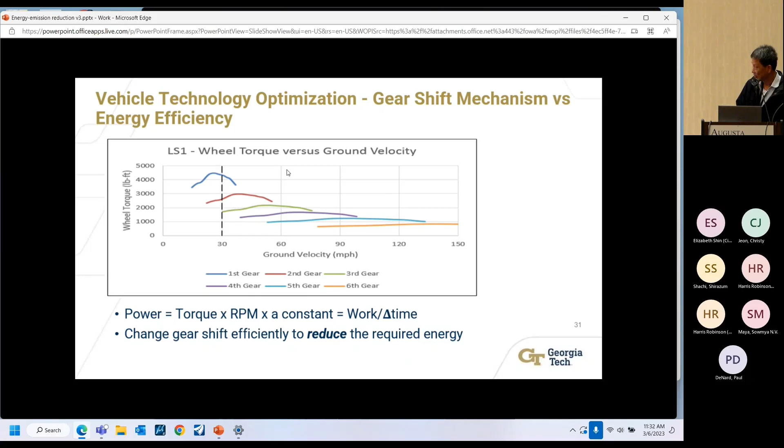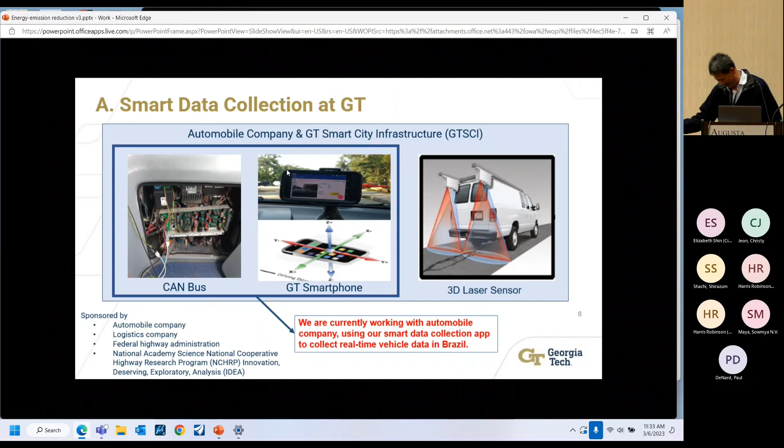So those are the ones for you to optimize. As I mentioned earlier, if I can create a map with a methodology for the entire Metro Atlanta, and then the entire nation, with different hours having different colors, then people can do optimization - figure out where the route is, do the planning, and cut down my fuel consumption.

As mentioned earlier, because you want to cut down the energy and emissions, we try to develop a methodology that can work on diesel or EV in the future - we can cut down electrical energy too. This is a methodology we've already put together, trying to find some pilot partners, some people interested to test it out.

For example, MARTA - as mentioned earlier, I can put in the smart data collection system for day 1, day 2, day 3, then we can give feedback on the contributing factors. If IMU data - I didn't show that here in the interest of time - if XYZ acceleration shows you have hard braking and are still driving downhill, you can capture that behavior, then suggest to the driver that they change that behavior the next day or next week, and recheck your fuel consumption.